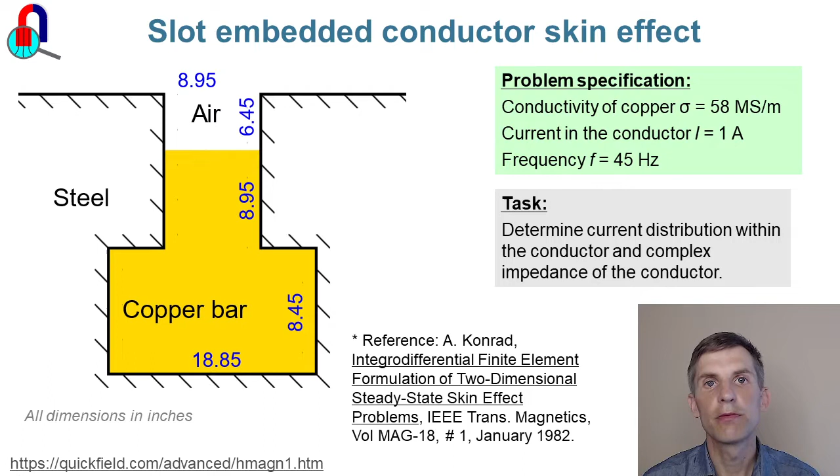Okay, let's start QuickField now. In QuickField, I create new problem. Slot. Next. Problem type is AC magnetics. Frequency is 45 Hz.

Every simulated device is a three-dimensional object. The slot is long and magnetic field distribution is the same in every and each cross-section. So I can use a two-dimensional model and simulate only a single cross-section. Model class is plane parallel. Length units are millimeters. Finish.

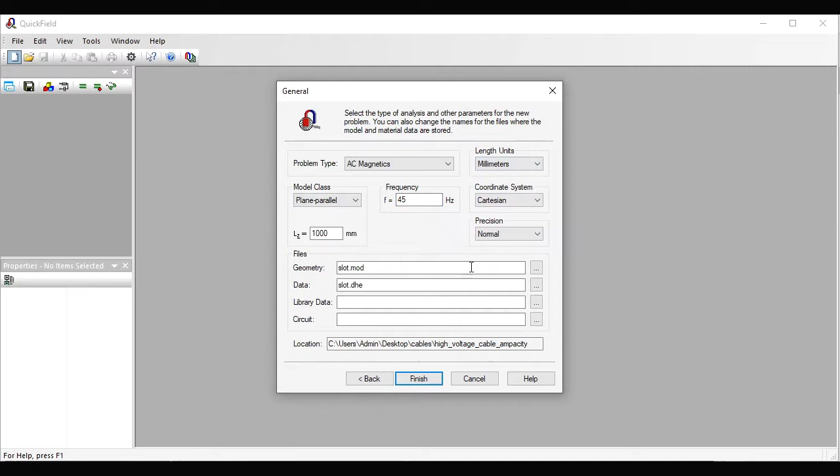On the left, you can see the problem pane, and on the right is the geometry model editor window. You can draw the geometry model here, or you can import the geometry model from the AutoCAD DXF file. The model is simple, so I'm going to draw it here from scratch.

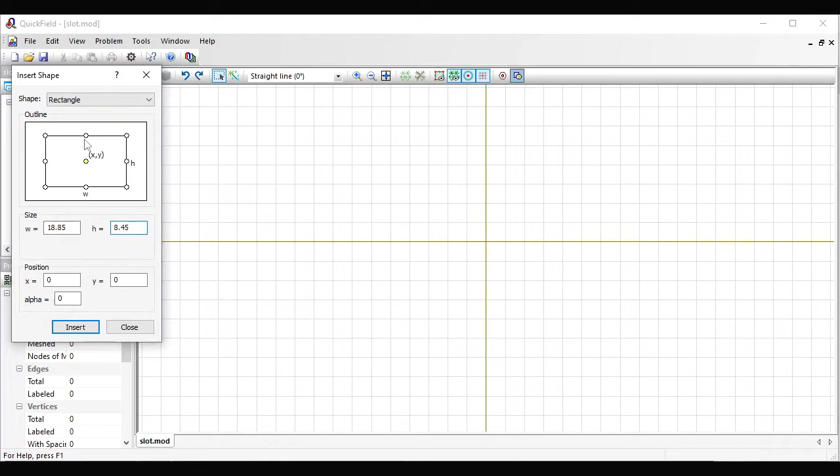First, I will insert a rectangle with dimensions 18.85 by 8.45. Insert. Then I will insert a smaller rectangle on top of this one with dimensions of 8.95 by 8.95. Insert. That is the copper block.

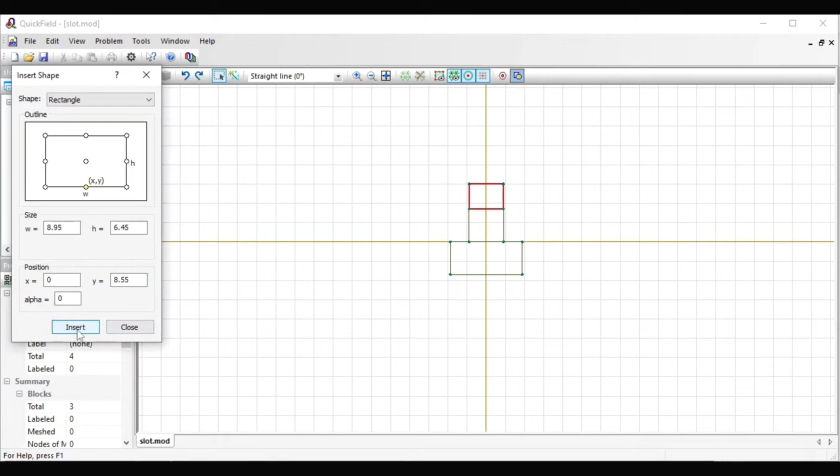And I will insert another rectangle with dimensions 8.95 by 6.45 on top of this one. So the vertical position is 8.55. Insert. Close, switch to select objects mode, click to select this edge and hit delete button to delete it.

Now let's assign labels. With labels, we explain the geometric object's meaning and provide material properties. Again, I am in select objects mode, click to select and type in the label name here. This is copper. This is air.

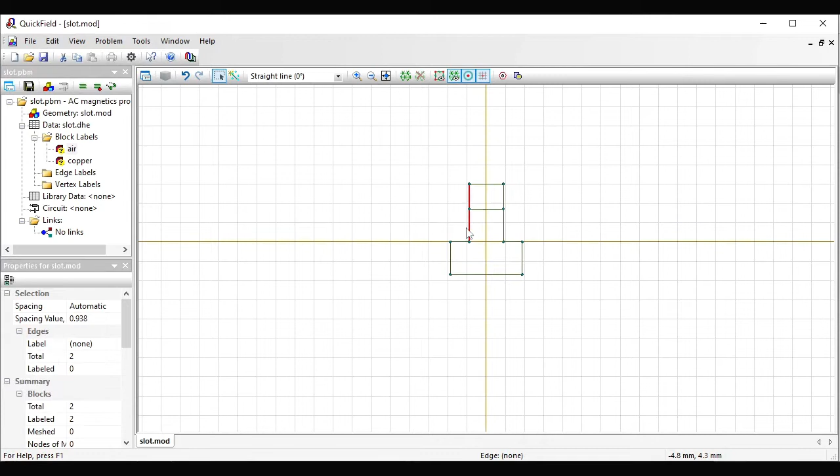And these edges are the magnetic slot boundary. To select multiple objects at the same time, hold the control button pressed. Okay, this is slot. And this is top of the slot.

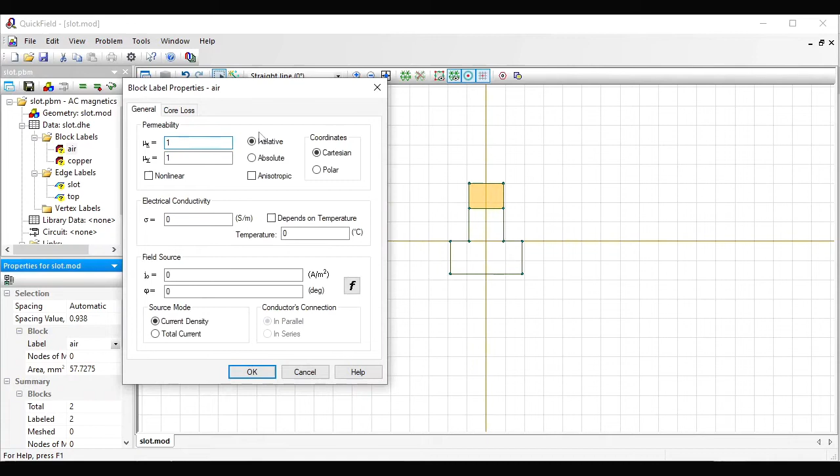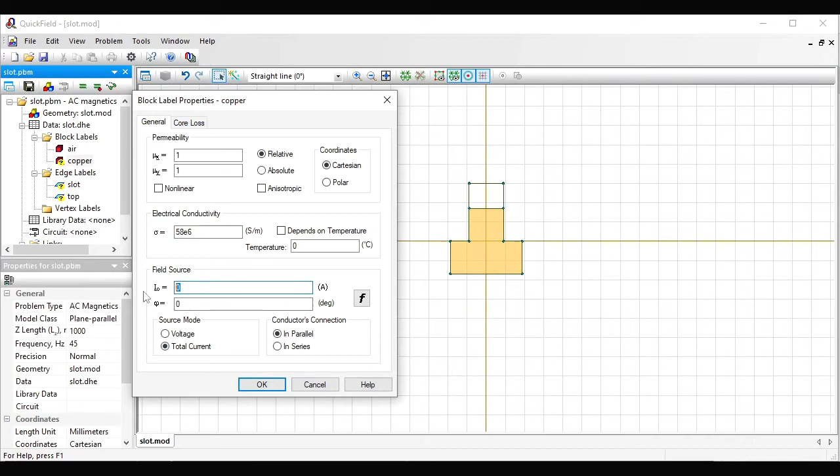Now let's provide physical properties for these labels. Double-click the label name in the tree. The relative magnetic permeability of the air is 1. Okay. Relative magnetic permeability of copper is 1, and electrical conductivity is 58 megasiemens per meter. And the total current is 1 ampere. Okay.

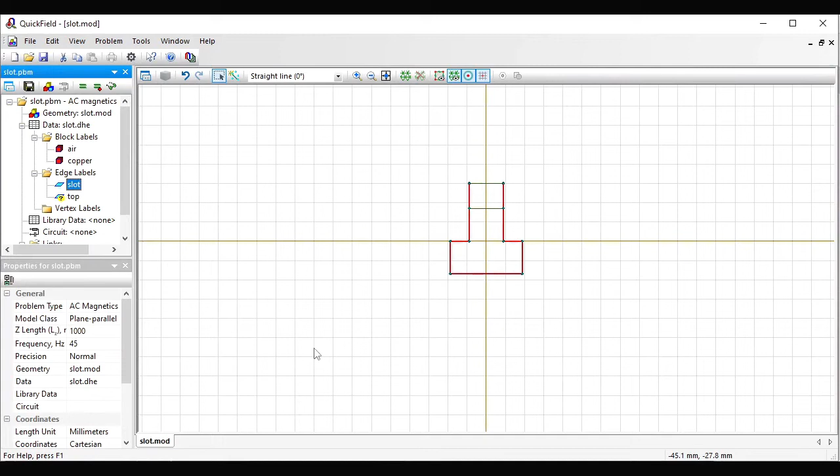We assume that the steel slot is infinitely permeable and set zero tangential field component on the steel slot boundary. Okay. We also assume that the field is contained within the slot, so the field lines will go parallel to this boundary, top boundary, and I will specify a constant value of electromagnetic potential here, for example 0. Okay.

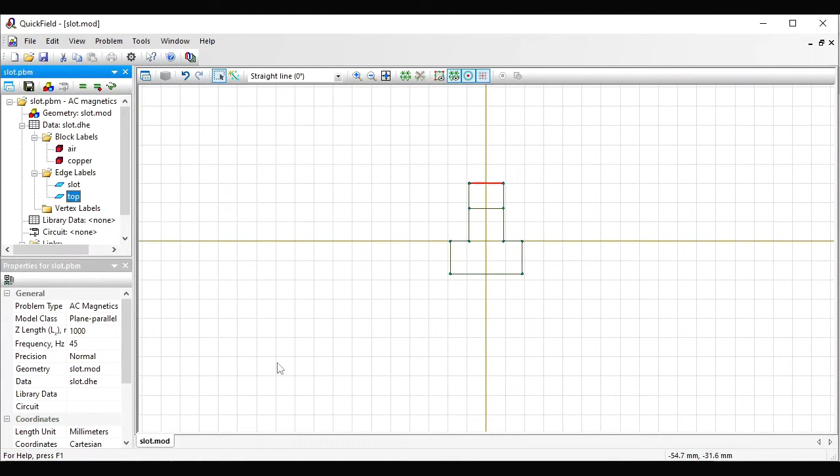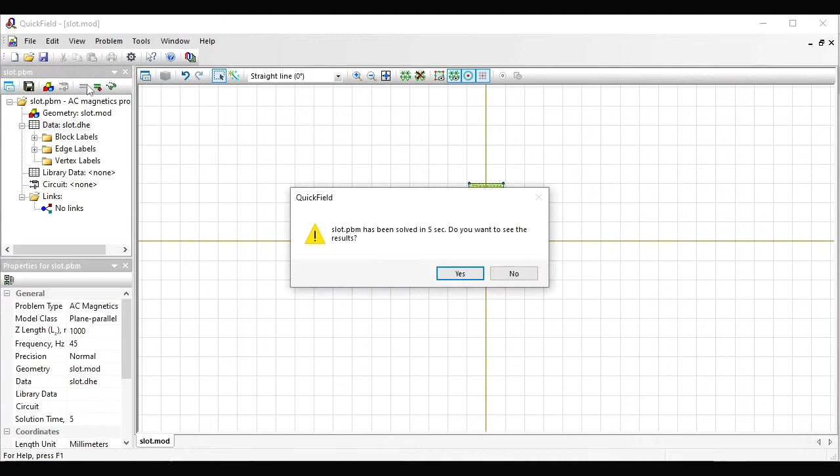Geometry model and the data are ready. Before I start the analysis, I should build the finite element mesh. Just press this button and the mesh will be generated. Now save all problem files and solve the problem. Let's take a look at the results. Here you can see the magnetic field lines and the color map of the current density distribution in the slot.

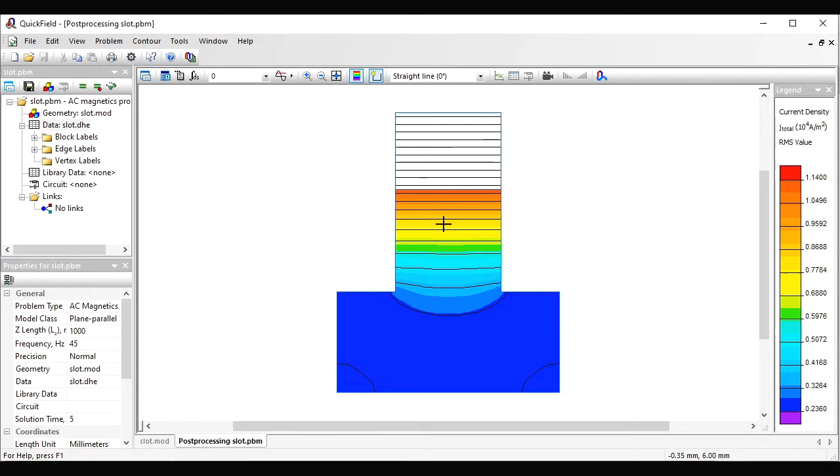Now let's check some parameters. Remember, we have specified electric current value. How can I check that the current value is correct? I can use the contour tool, click to select the conductor, follow to the integrals, and calculate the integral total current. 1 ampere, and the phase shift was 0 degrees. It's almost 0. And what is the voltage drop?

To calculate the voltage drop, I should use the local values tool. Click any point, and here in this point you can get the field parameters: current density, flux density, and the voltage. This is the voltage drop per 1 meter of conductor length.

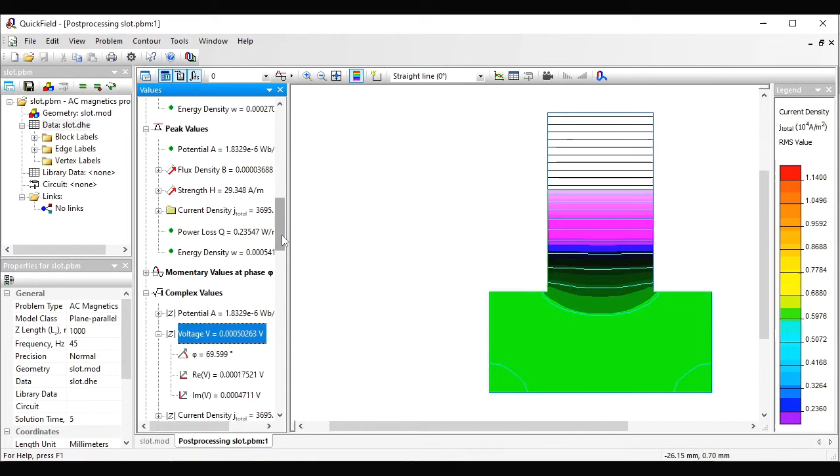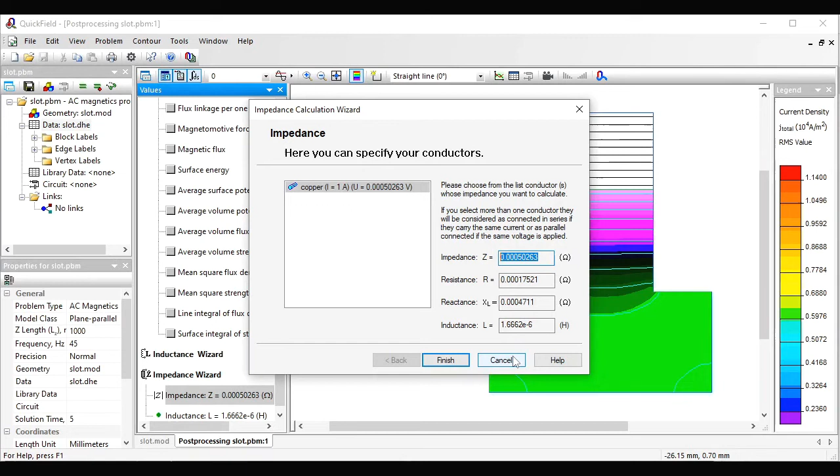Now, if I would like to calculate the impedance of the conductor, I should divide the complex value of the voltage by the complex value of the total current. QuickField features a wizard that can do math for you. Here it is, impedance wizard. You should select the conductor, and QuickField will divide voltage drop by the current. And here you will get the resistance, inductance, and the impedance.

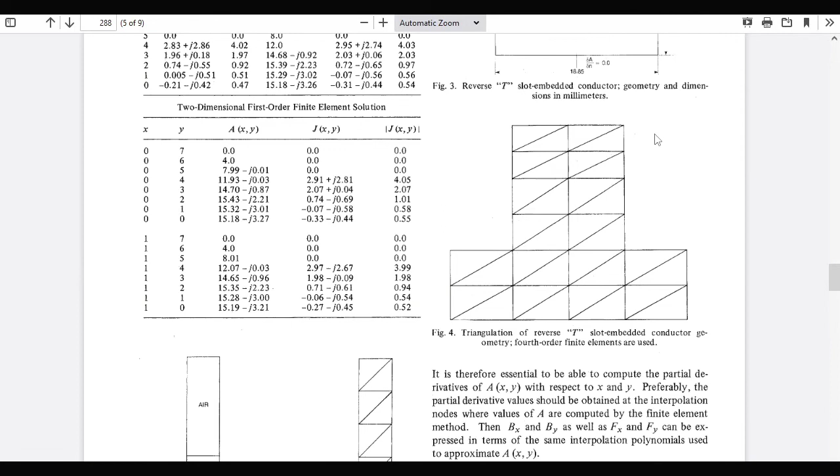Now let's compare values calculated in QuickField with the values published. Here is the paper. This is the slot. Now let's find some reference value. Here it is. At 45 Hz, the source current density should be this value. Okay, let's calculate the source current density in QuickField. In QuickField, source current density is called external current density.

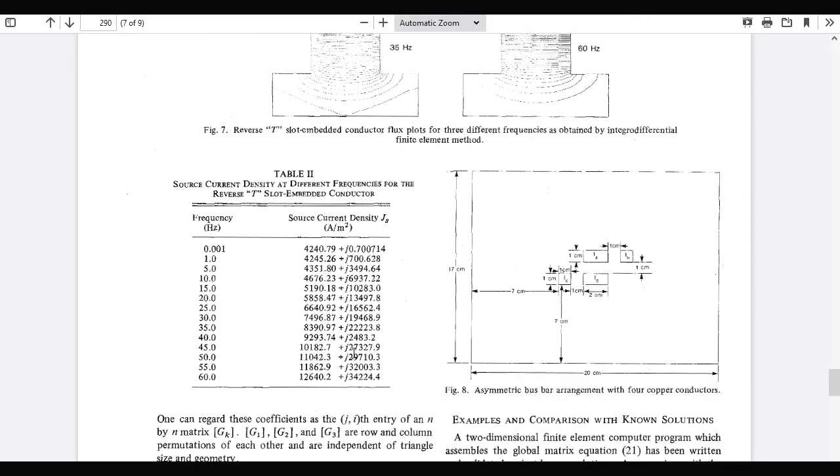Here is QuickField. I'm going to adjust the field picture and switch on the color map of the external current density. Contour clear. This is root mean square value, and I need the complex value. Again, I will use the local values tool. Click any point. You see the current density distribution is uniform, so I can choose any point to click. And here is the external current.

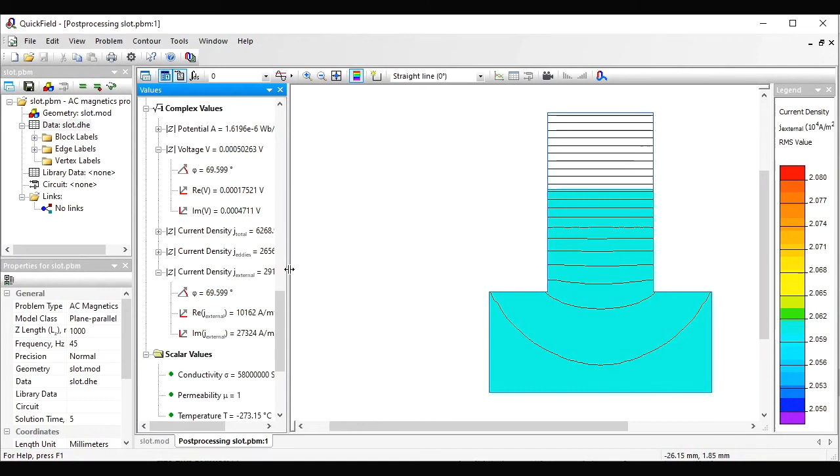Now let's compare these values with the reference. 10,162 and 10,182. The difference is less than 1%, and this is a real component. And what about the imaginary part? 27,324, 27,328. Almost perfect match.

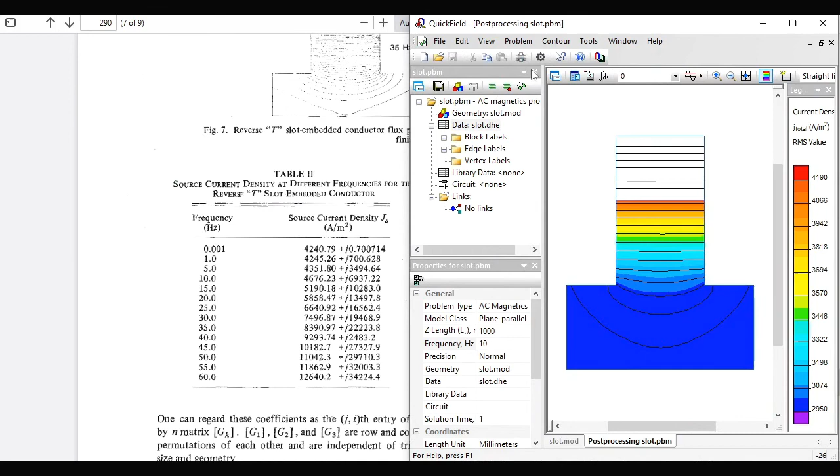Okay, let's change the frequency. For example, 10 Hz. Run the analysis again. Take a look at the results. Again, I will adjust the field picture to make sure that the external current density distribution is uniform. Now let's use the local values tool. Click any point, and here's the external current density.

Let's check the values again. 10 Hz, 4,676, 4,672, and the imaginary part 6926, 6937. Again, the difference is less than 1%.